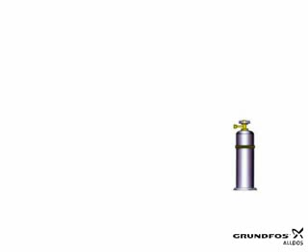At first, you need chlorine gas. Chlorine gas is available in cylinders. The question is, how many cylinders do you need? 1 cylinder, 2 cylinders, or more?

The DIN 19606 defines the number of necessary chlorine gas cylinders. The maximum extraction of chlorine gas is 1% per hour of the content of the cylinder or drum. If you have 65 kg, you can extract 650 grams per hour. If you have 1 ton, you can extract 10 kg per hour.

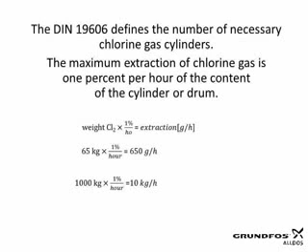To extract a higher amount, you must connect several chlorine gas cylinders.

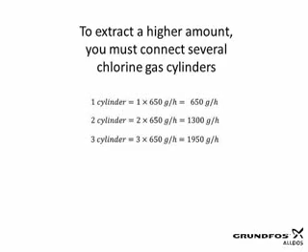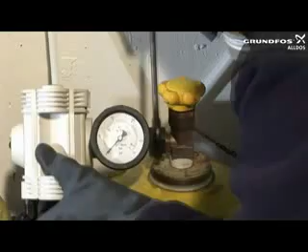To extract the chlorine gas, you need a connection to the system. For the connection of the chlorine gas cylinders, we use the vacuum regulator VGA111. The vacuum regulator closes the cylinder when the cylinder valve is open. The VGA111 is a security valve. It only opens when the chlorine is sucked out. I will explain later the security principle of our chlorine gas system.

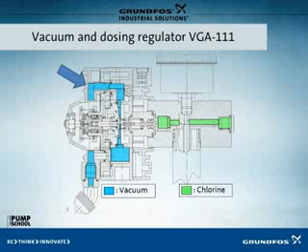Here you can see a sectional drawing of the VGA111. Blue is the vacuum and green is the chlorine gas. The security valve opens only when a vacuum has built up and the chlorine gas is sucked out.

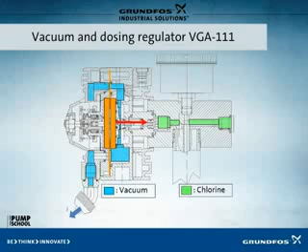Now you put the VGA111 on the cylinder. In our example, we have 2 cylinders. What happens if the chlorine gas cylinders are empty? The chlorination stops. This is the reason why you need 2 additional cylinders: 2 in duty and 2 in standby.

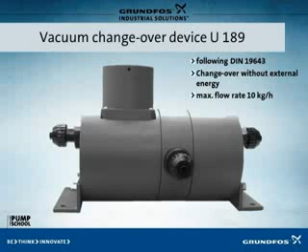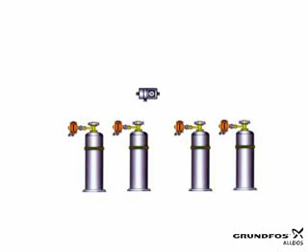To change between standby and operation, you can use the changeover device U189. The U189 doesn't need any electrical power and works in connection with the vacuum. If one side has been evacuated, it will change automatically to the full side.

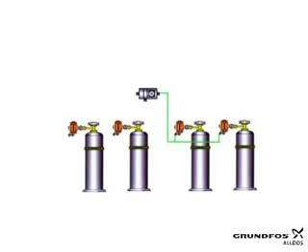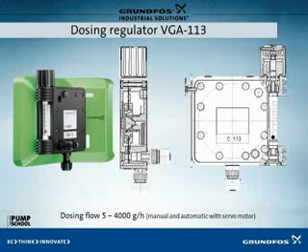The next step is to connect the vacuum regulator and the changeover device with the PE tubes. For the regulation of the chlorine gas amount, you can install the dosing regulator VGA113, which is available in different sizes. With the dosing regulator, you can adjust the chlorine gas amount in grams per hour.

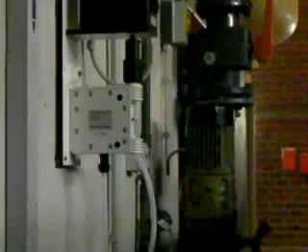The VGA113 can be connected to a measurement and control system, for example, the Conex DIA-2Q, via a servo motor. For every chlorine gas injection point, you have to use a separate dosing regulator. The VGA113 can be connected in parallel mode.

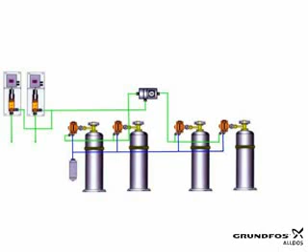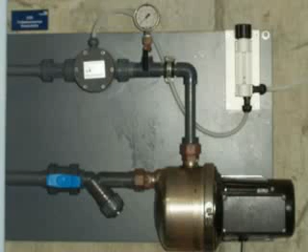The last component you need is the injector. The injector works according to the Venturi principle. With a high water flow, a vacuum is created. The vacuum sucks the chlorine gas in and mixes it with the water.

The chlorine gas dosing system is now ready. The injector is installed in a bypass line and needs a high inlet pressure. For this, Grundfos offers a booster pump CRN. The dimensioning of the injector and the booster pump depends on the size of the dosing regulator.

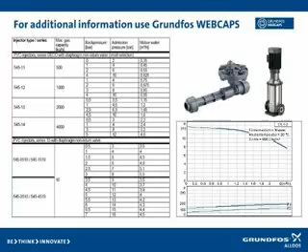You can find all product-related information on Grundfos WEBCAPS.

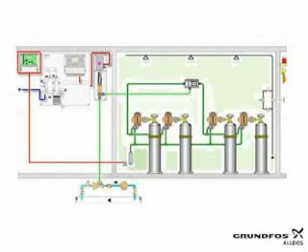The security principle of the DIN 19606 requires that all components with pressurized chlorine gas are installed in a separate room, the chlorine gas room. If chlorine gas leaks out, it will be contained in this special room. The gas warning device, the Conex DIA-G, informs the operator about the leakage and starts the sprinkler system or the air exhaust system.

The tube leading from the injector to the vacuum regulator VGA111 has a vacuum. The chlorine is extracted from the chlorine gas cylinder. If there is any leakage, air is sucked in and the vacuum regulator closes the cylinder.

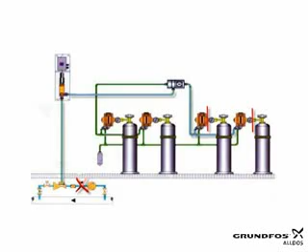If the bypass water flow stops, the vacuum will break down and the chlorine gas cylinder will be closed. The dosing regulator VGA113 and the injector can be installed outside the chlorine gas room because all the components work with vacuum.

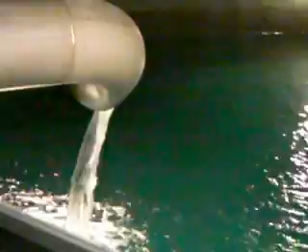Chlorine gas is used to treat drinking water. Thanks to its high safety standards, it's the most widely used disinfectant worldwide. It's a highly effective oxidant and disinfectant. Chlorine destroys nearly all microorganisms, even at low concentrations, which are harmless to humans.